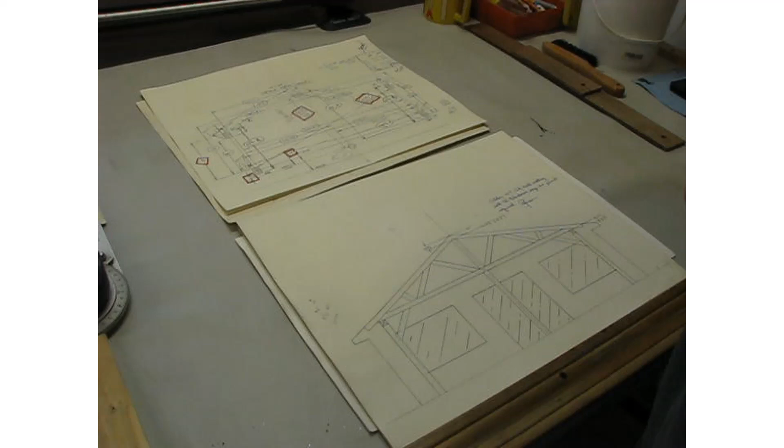This is one of the first drawings that I did. The outer profile represents the sunroom that we have on our house. It has a 5-12 pitch. This beam structure is the pavilion, and you'll see I'm attempting to match the same height and angle as the house. You'll also note that it's not as wide as the sunroom, and it's driven primarily by the length of this single piece right here.

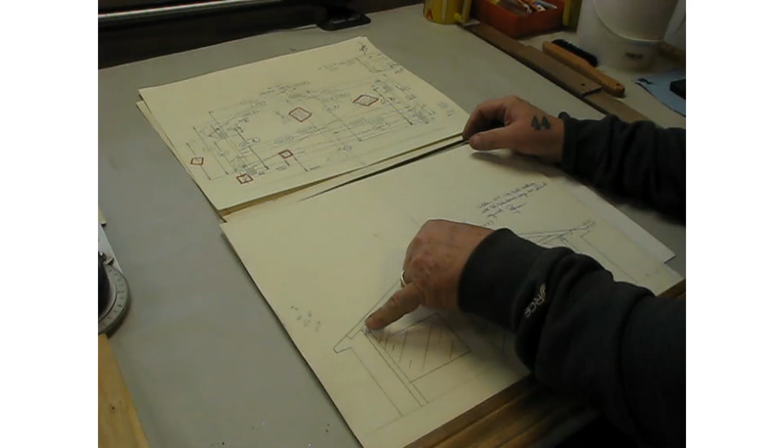This is the 4th beam out in front that has a split lower post, but the other 3 trusses you see in the intro on the model have a single piece. The longest piece I can get is 24 feet, so from that point to that point is 24 feet. Up an appropriate amount to get a 5-12 pitch, which I'm using 22.5 degrees for. That's how big it is. So from here to here is not as wide as the house.

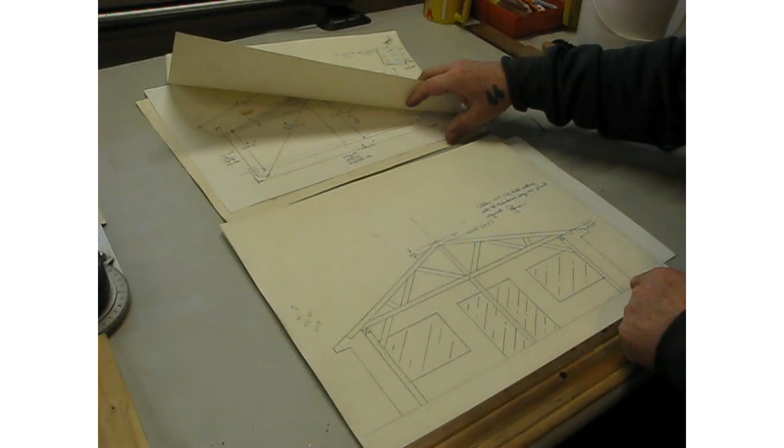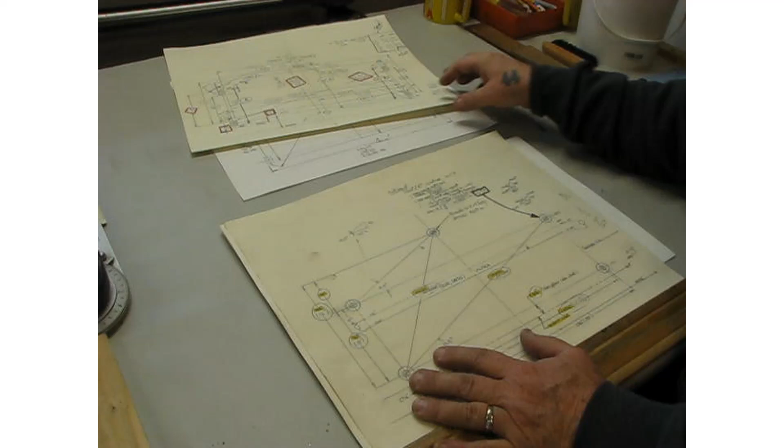The next thing that I did was lay out the footings. I have 22 feet 6.5 inches from here to here, and that's driven by a couple things. You'll see right here that this 24-foot piece actually goes to here, but I didn't want the vertical support to be out over this skinny piece, so I moved it in 6 inches so that it is supporting more over the center of this joint area.

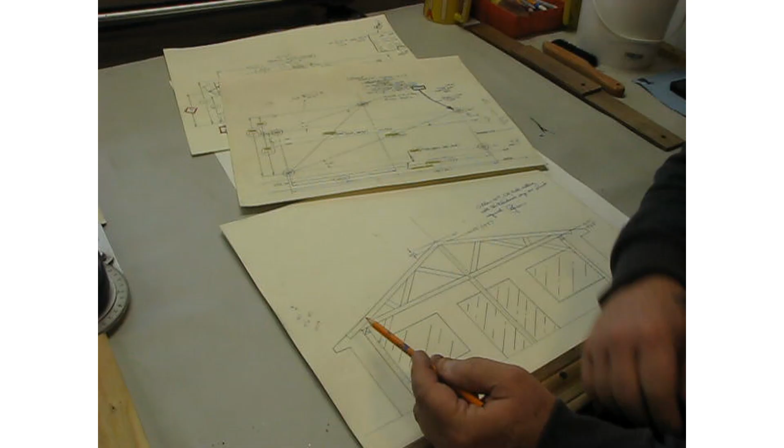So this is the footings. Originally I thought they were going to be small and round, but they ended up being rectangular on the top. They're a little over 4 feet deep and about 24 inches in diameter, and there's 5 of them.

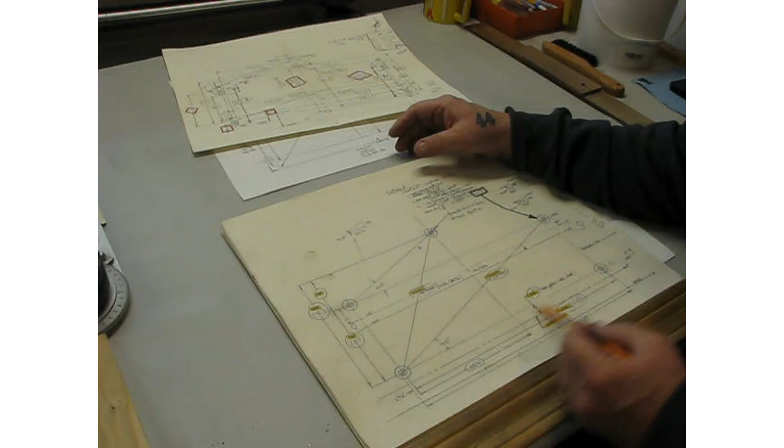This is pretty much 24 feet. They're 8 feet from here out, 12 feet from here up. Here it's 19.5 degrees from the center of this post to the center of this post, but the front truss on the building actually sits towards the front here, so it's 15 degrees.

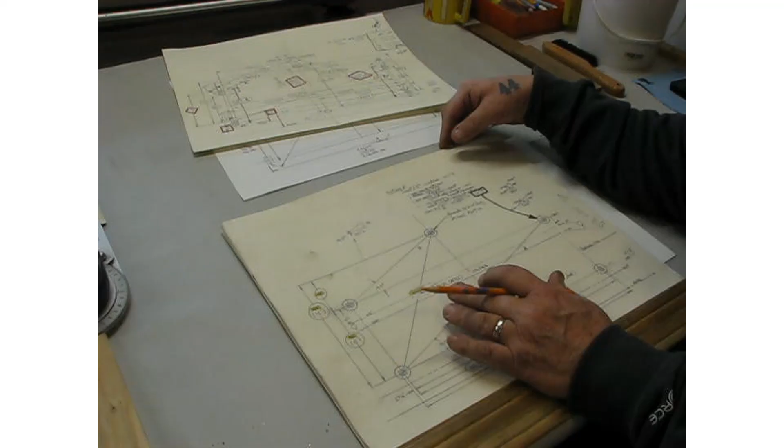I did some load calculations based on what the city engineer requested, and it was asked that the footings be at least 16 inches in diameter, and we are, what did I say, 24.

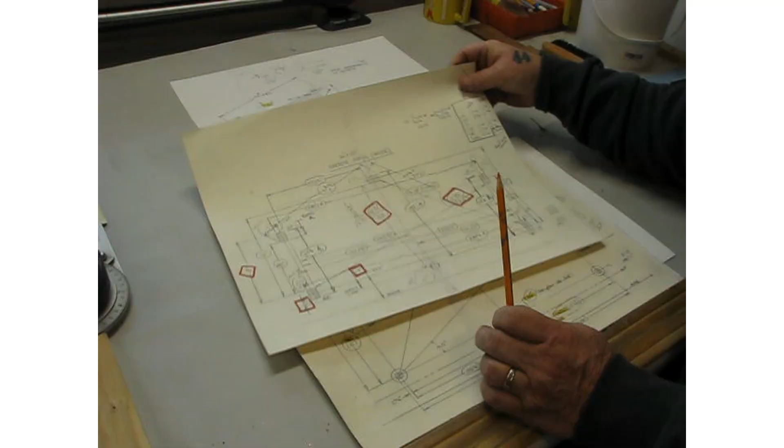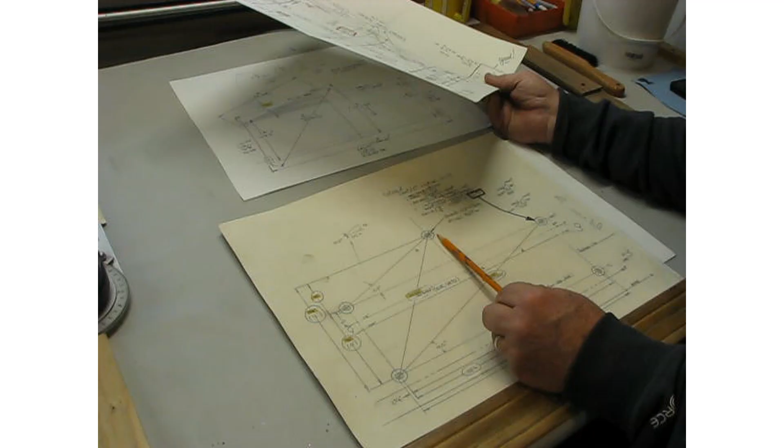So this is the layout of the rectangular pad. It's rectangular form on top. The diameter of the footing is round, but we have a rectangular portion above ground. The reason I went rectangular is the supports that hold the 6x6 beams sit nicer on a rectangular portion than they do the round portion, because on the round portion, the brackets would hang slightly over on the corners, and I didn't like that look. So we made them rectangular. This one sits this direction and the other 4 are parallel in the east-west direction.

This is a drawing that I did to help the concrete guys as far as measuring the forms from the outside or inside of the form, but the outside of the concrete, and the angles, so that we get it as accurate as we can.

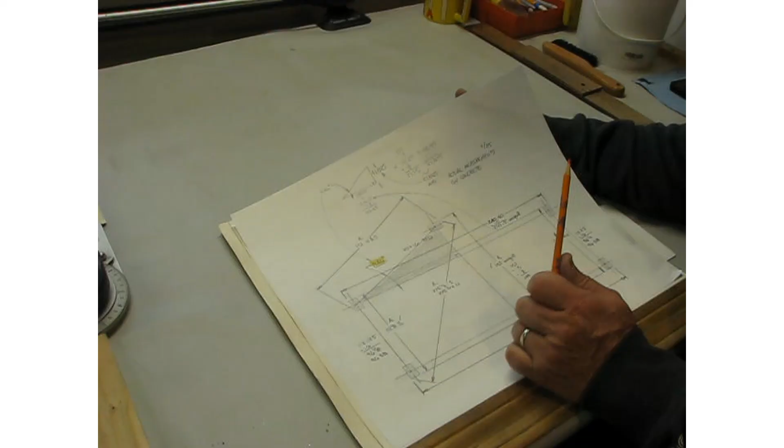Being a 43-year aerospace engineer, I'm a little finicky, so everything on this project is within about 15 thousandths or a 64th of an inch. That's my attempt anyway.

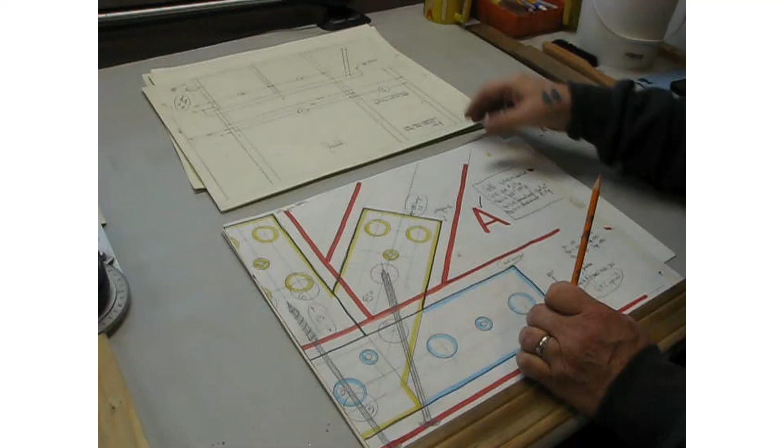So this is one of the first items that I did. It's the bracketry for the horizontal beam, the vertical, and the 45s that go out at an angle. I'm using 4x6 material purchased from Menards. The vertical pieces are 6x6. So this is a 4-inch piece of steel, which gives me 3/4 of an inch on each side.

You'll see that I drew in screws, and this is where the bolts go, and these are 2-inch screws that go in. So far I have not used these screws. I have been happy with the bolted joint, and at this point I don't think I'm going to put these in, but if I needed to, I have accommodated them to go in there. I tried to minimize the number of bolts in the bottom piece because I didn't want to take too much material away from this area here. So you'll see I have just a straight line and then some of the screws that are on here.

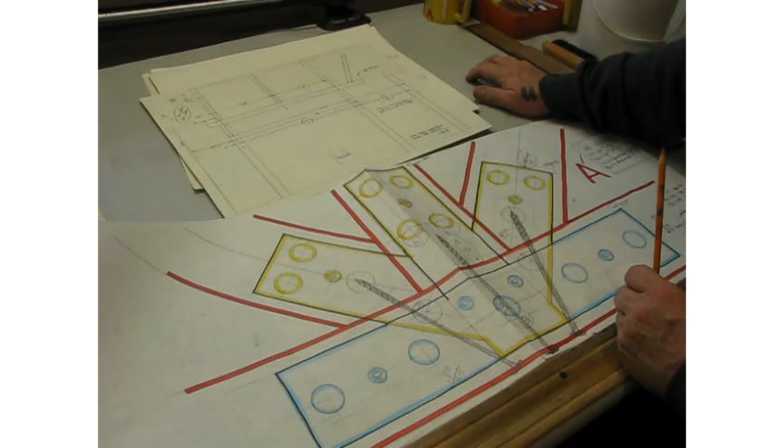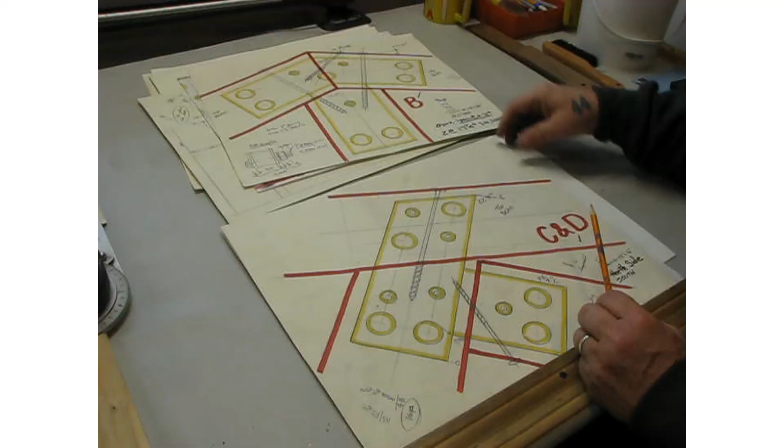This is the top piece, the 22.5 angle, the vertical element. Again, you'll see my thought on screws, but not using that. One of the 45 and 22.5 pieces, the bottom with the 45 and then the 22.5. There's quite a number of these, and the thing about these is they have to be a front and a back as far as the way they're welded.

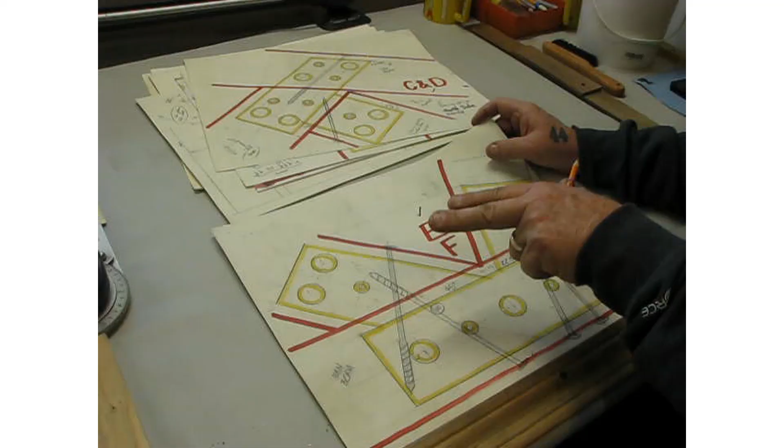Because on the steel I chamfered it halfway through, tack welded it on the back, completely welded the front, clamped to a 5/16 inch thick steel plate, and then ground the back. So there has to be a front and a back on the parts that are not symmetrical.

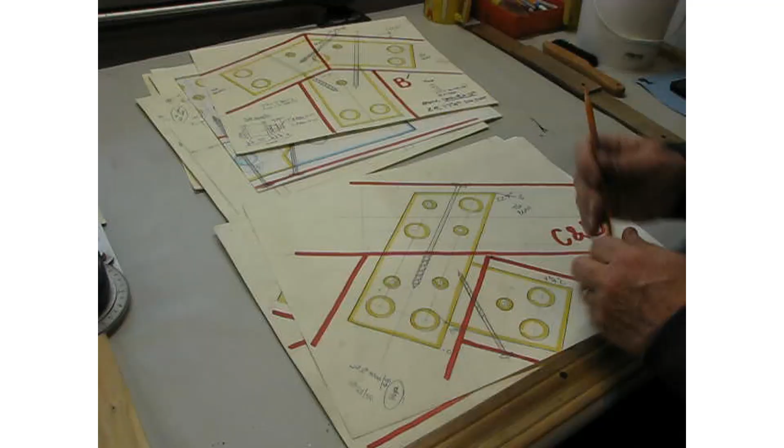This part, for example, is symmetrical - it's the same on the front as it is on the back, so I just had to make double of all of the same design on here. But on these, they're not symmetrical, so I had to make front and backs on that one, front and backs on that one, and front and backs on this one.

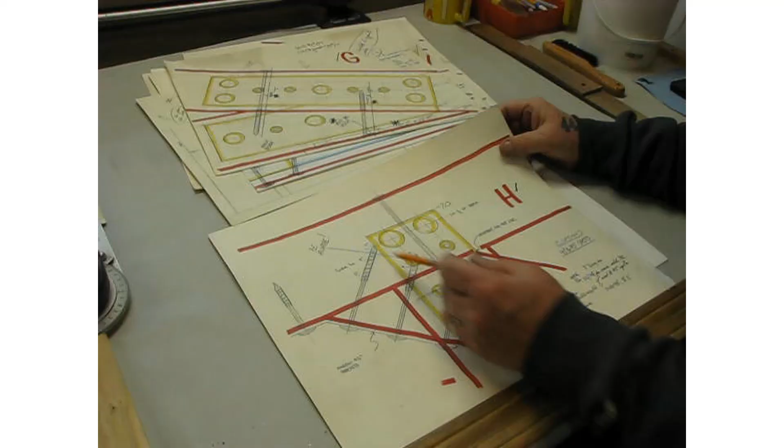This is the end of the lower beam. Here you'll see it's 24 feet to that point, and this is the 22.5 angle going up. This is just a rectangular plate to tie into the ends.

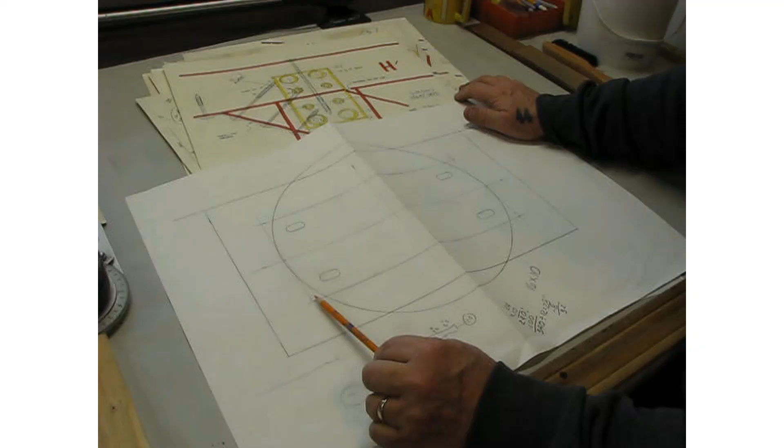And this is just a drawing of the base bracket and the rectangular concrete pad versus the round pad. You can see that they would have, the bracketry would have stuck out over the edge. I'm not a fan of that. So this gives me about 2 inches on each side here. I can move it a 1/4 inch or so and it's going to look still centered.

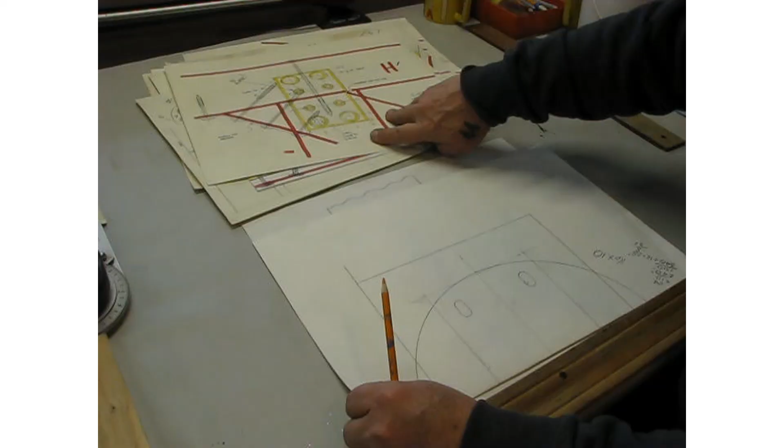So that is the basic principle of the design, starting with the space that you have. You've got to look at the lumber that you can get, and cost too, I suspect, but that's it.